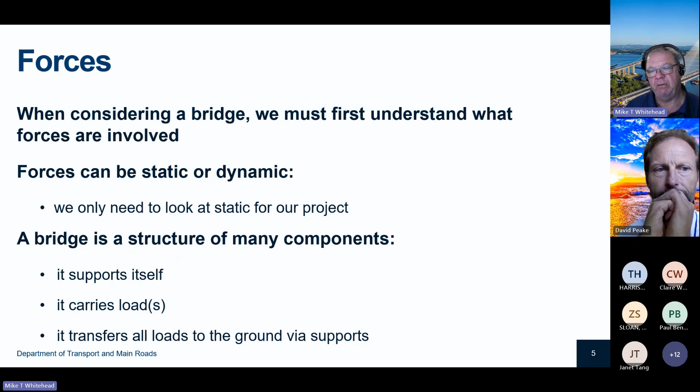So there's a number of forces, and this is where we get into the good old physics. Obviously a piece of spaghetti can be under compression. Whether it's a piece of steel, concrete, or spaghetti, if you have forces at either end pushing it in to try and squash it, it is in compression. If you grab it and try to pull it apart, that's tension. You then can have bending.

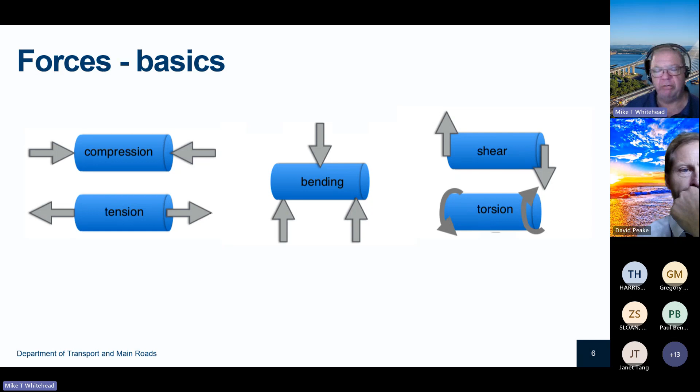Usually if you put a ruler on two rubbers on either side and try to bend it in the middle, that's a bending motion. There's shear forces where one part wants to go one direction and another part goes in another direction, that's where it will snap. And then you can obviously twist it, and that's what causes torsional forces.

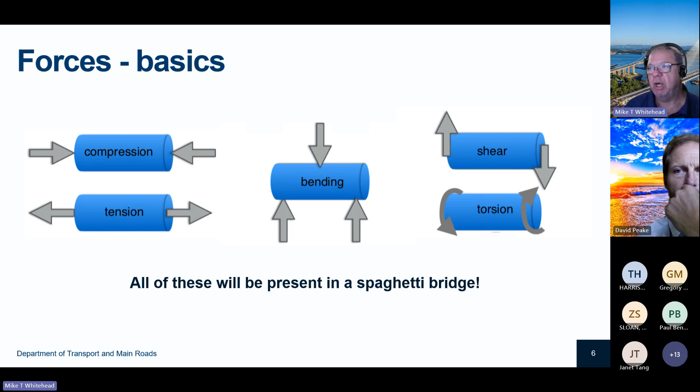Interesting enough, all of those will be present in a spaghetti bridge, and the students have to understand that and design and fabricate or build their bridge to handle these forces. I'm hoping to give you some guidance on that.

So obviously when a member is under compression, if you try to get a piece of spaghetti and squeeze it from both ends, it'll try to buckle. It's going to bend in, out, whatever it is.

So that's the failure method. So obviously if you squeeze it too much, it will just bend too much and then break itself. So when you've got pieces that are under compression forces, you try to thicken them up. The thicker they are, the less likely they are to buckle. Under tension, obviously when you try and stretch it, it's ultimately going to snap. It's just going to start getting thinner and thinner when it starts to fail.

Spaghetti, unfortunately, doesn't really thin down. It just breaks. So it's a bit hard to work out if it's starting to fail there. Not much you can do about it other than, yes, thicken the member up, but generally you find members under compression are thicker than members under tension. They usually can tolerate more force and therefore can be thinner. When bending occurs, you actually have multiple forces occurring in the structure, and there's different ways to handle that bending, and that's why we have different shapes in our bridges to handle that.

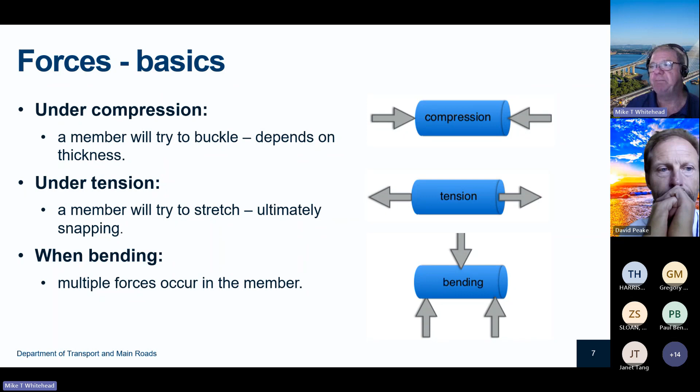If we have a look at it a little bit closely, the top part of this beam is actually trying to shorten. So when it's bending down, it's actually shortening. So it's in compression, whereas alternatively the bottom side of it is actually trying to stretch. So therefore it's in tension. So a beam under a bending load is actually experiencing compression and tension at exactly the same time. So again, the structure has to be able to cater for that.

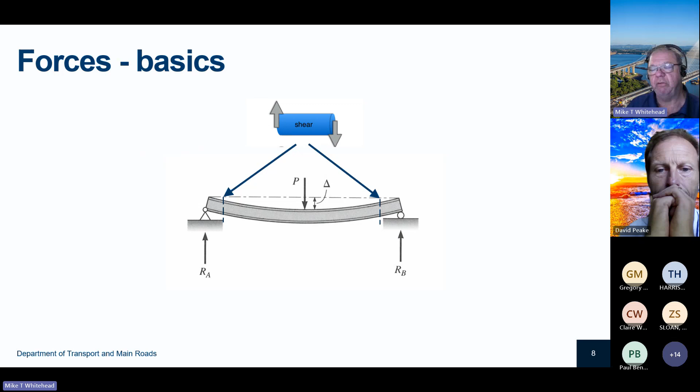You'll also find that there's shear occurring. It's usually towards the ends. So again, it's a spot placed between the forces. So you've got P down and the two R's up. So shear is going to go somewhere in there. And it's usually closer to the supports. And then again, to cater for that, maybe a little bit of thickening around that area to cater for it.

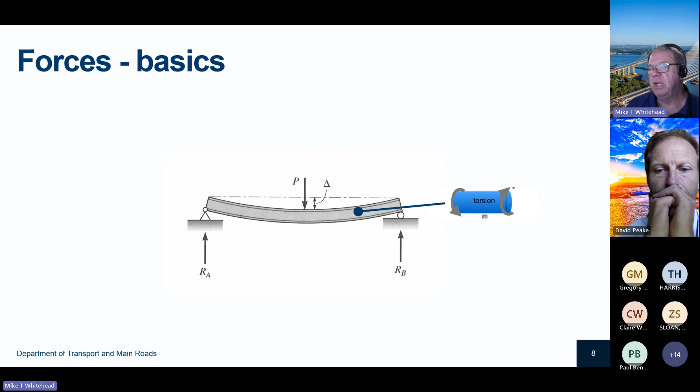And the other one that's there is obviously torsion. So under load, for various reasons, unless it's perfectly symmetrical, any little offset, even by a mil or two, the beam or the member will start to want to twist under extreme load, and that's where the torsional twisting starts. And again, there's ways to compensate for it that we use in our day-to-day structures.

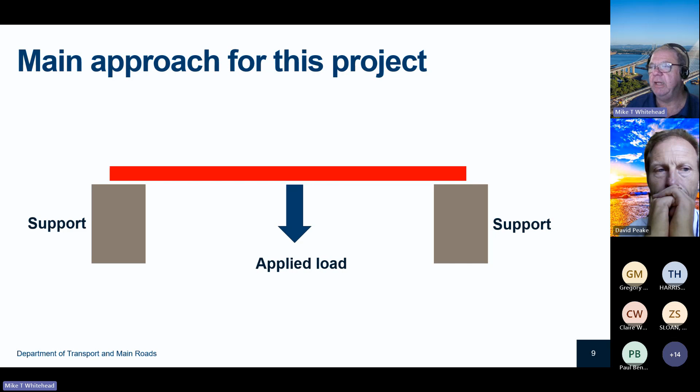So again, simply now we have two supports, which is the frame that the students will load their bridge on. The red represents the spaghetti bridge, whatever shape. Then there's applied load underneath it, which is on a hook, and it'll be pulling down. So roughly speaking, the load will split halfway, and it's probably really important that students understand this. To even up the structure, when they're setting it up on the rig and when they're actually building their structure, try and get the hook right in the middle so that you get as close as possible to 50% of load going to one side and 50% load going to the other.

If it's off, you're starting to increase the percentage of load going to one side over the other. So that side will be the side that's going to experience the most loading and likely to be the failure point. So you want the whole structure to basically try and share the load as close as you can to half-half. And then how these loads are transferred does depend on the type of bridge, which is what we'll explore now.

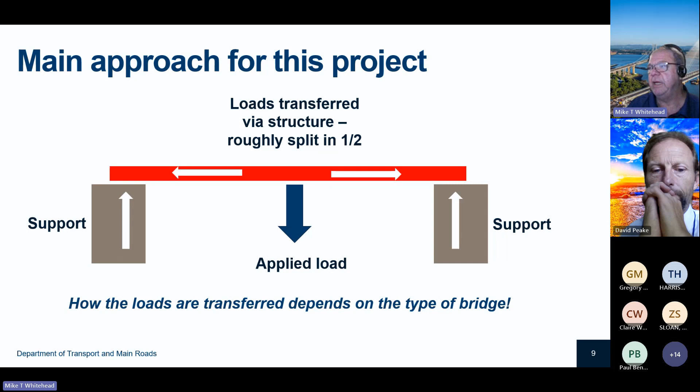So there's a whole range of structures around the world, and this doesn't cover all of them, but these are probably the main ones you'll see. So a beam bridge is quite a common one. It's just simply a whole series of beams with a deck on top supported by the piers underneath. Then you have a truss bridge, which can get a longer span because the loads are transferred from the deck up through the truss and then transferred across to the other side.

Cantilever bridges are a little bit unique in the sense that they self-support from one side and self-support from the other side. So essentially, you can see a little gap in there. It means that the bridge doesn't actually have to connect.

If you take a cantilever bridge like the Story Bridge and cut it perfectly in half, it won't fall down, because it's supported by the two main supports and the span is held up evenly by either side. So it doesn't rely on sharing load across. You have arch bridges, and I showed you a picture of an arch bridge, and arch bridges were some of the earliest bridges ever known to mankind, built with stone in the shape of an arch over creeks, etc. So they're a very strong structure.

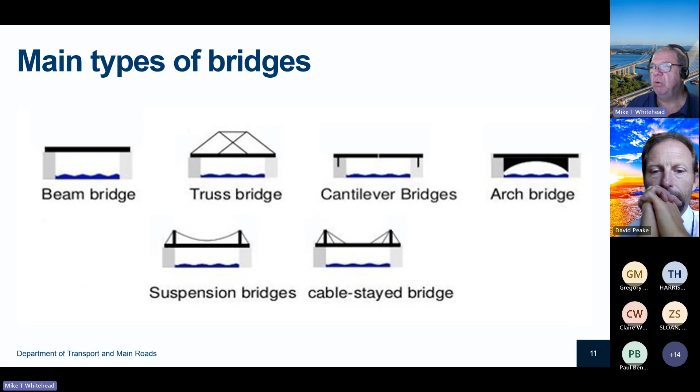Then you have suspension bridges, and that's a whole new ball game, and then cable-stayed bridges. Again, the picture that was behind me on the left-hand side of my head is a large cable-stayed bridge. All right, so the ones that you're most likely to come across in this competition is a beam, of various shapes and sizes. Trusses do appear occasionally. The one that seems to be the winner at the moment is an arch bridge. Unfortunately, this picture is not valid because you can't use the sides of supports, but you can flip it and put the arch above, and that's the type of structure.

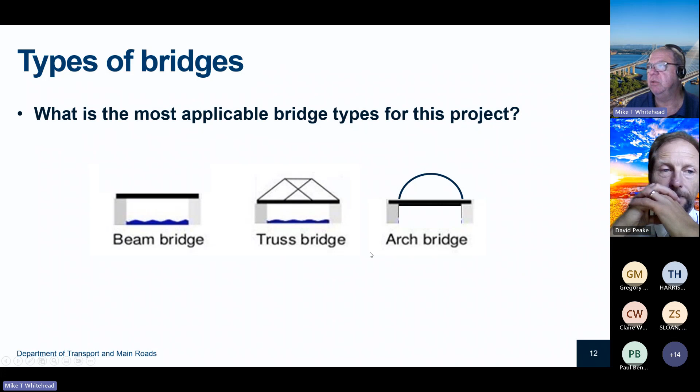Very difficult to make, can be problematic, but it also at this moment in time seems to be one of the stronger structures. I think it's probably because people haven't considered trusses and beams more fully, and these ones would be easier to build than the arch one. But yeah, we'll see, and it's up to the students to maybe try a few of them and see which ones they like or which ones can work better for them.

So now looking at the practical application. So again, these bridges are basically using commercially available spaghetti. Go to the shop, buy it. You're using either PVA white glue, hot glue, or super glue. The dimensions must include a loading hook at the midpoint of the bridge. You must have a deck. I won't spend too much time on this because Greg goes through it a little bit more. The important thing about the deck is you must actually have a deck on it. It only needs to be about 3 centimeters wide. Doesn't have to be very wide. It's essentially so we can drive a matchbox car across it.

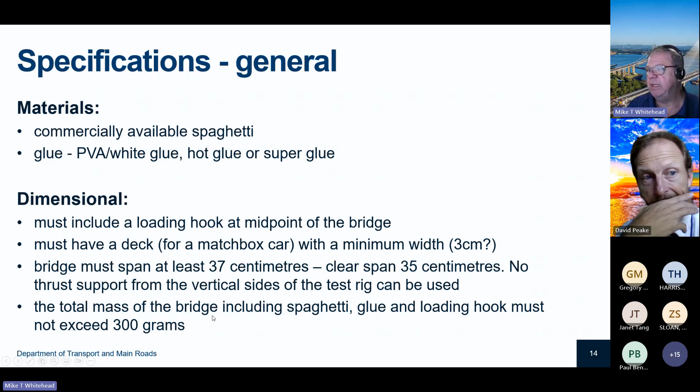So the key factor is to understand how the spaghetti performs. So how's it going to perform under compression, under tension? When it's glued, does it actually change properties when it gets wetted up with glue? And to make arches and some other shapes, we've had students slightly wet or dampen the spaghetti so they can bend it into shape and then let it dry. Does it change properties? Again, it's essentially flour and water, etc. So does it actually change?

And students could actually undertake this through a series of little experiments whenever time permits to just see how it works. So it is important to try and test and prototype your designs, so probably get students started earlier and have a bit of a play. There's probably a ton of them on YouTube. They could get some ideas from there and see how things have worked. And let's also note that the quality of spaghetti does vary from brand to brand and from packet to packet. So it's not a consistent product. So there's no real easy answer which brand's better than another, and you could get a dud packet that breaks really easily. So probably just use what they can get.

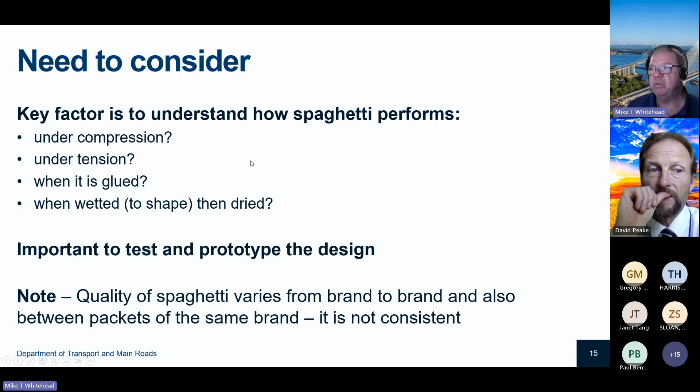All right, how the metal hook is supported is probably a key point because the load is applied there. So it's a real concentrated point force, and it's going to try and pull the bridge down. And so how the metal hook is placed in the bridge and supported is really, really important, because if the spaghetti is lightly supported in there, the load will just break the spaghetti pretty quickly and fall through, and the rest of the bridge will stay still. So it is really important to keep that area well supported, well braced, I suppose, in the structure.

As I said, the deck doesn't need to carry any load, so keep it light. And it is important to brace the structure, and we'll get a little bit more into that. The bracing actually stops the twisting.

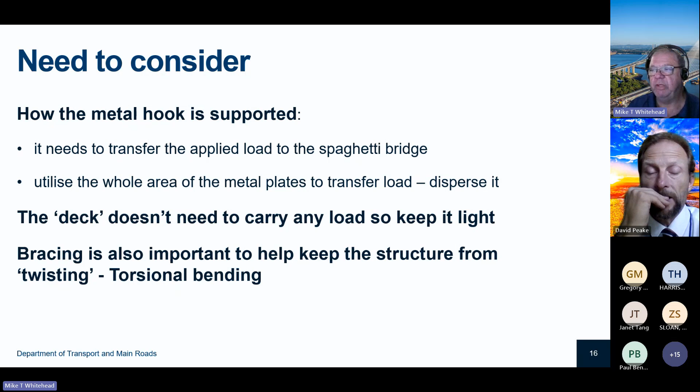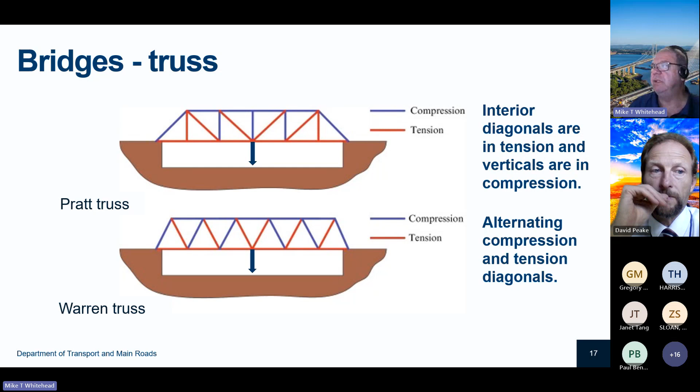So again, having a look at that, we know that buckling is probably the failure mode in compression. So maybe those members are a little bit thicker than the members in tension. So again, it might be good to think about how we can distribute the load to maximize the strength of it, instead of making all members exactly the same, where you could be wasting material.

This is a fully detailed picture of what a truss bridge looks like. This one here, obviously you've got a truss on one side, another truss on the other side. You have a deck, and then you actually have all the different cross braces in there to stop it from twisting and moving. So the students wouldn't have to build something this elaborate, but it would certainly give them some good ideas how they could brace it, and actually make a box shape, which is quite a strong shape to carry the load instead of having one truss.

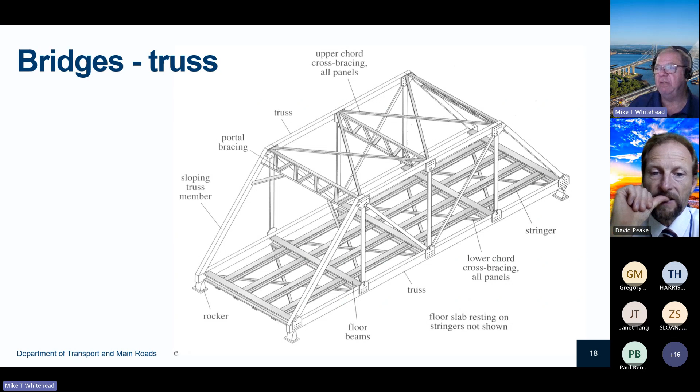There's an example of a great truss bridge, similar to the one I've just shown you, which is the Burdekin Bridge up in North Queensland. It's been there for quite a long time, carries both road and rail, and that is a really good example of a good truss bridge.

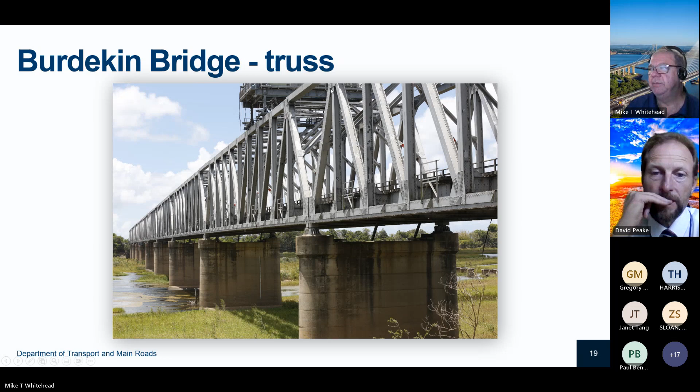So the next one we've got is arch. Arches are, as I said, quite a strong structure. The top arch is actually what carries the majority of the load. So whatever's on the deck, or the stiffening girder as it's mentioned here, that load gets transferred up through the hangers into the arch, then the arch transfers that across to the bearing supports on either side. So the arch itself is usually quite a thick, strong structure.

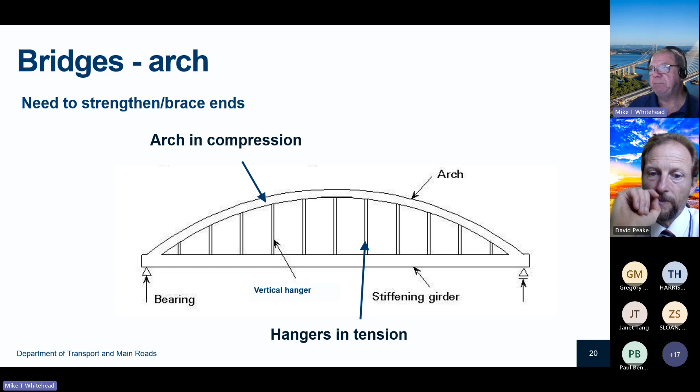With spaghetti, as I said, typically you would have to wet it or make a bit of a jig for it, wet it and then lay it in there and let it dry, or glue it in so that it dries in that arched form. And then you'd have to put in the hangers down to your deck. I'll go to the next slide.

On the right-hand side is an example of some arches that have been done around the world in spaghetti bridges. This one doesn't really have a deck, so it wouldn't pass. And to improve the strength, all the hangers are coming down to where the hook is. So again, the students could do that. We've had examples of that in the past in our local competition, where the hangers all come down to where the hook is to try and transfer the force on the hook up into the arch and then down to the sides. But again, this one doesn't have a deck, so it wouldn't be permitted.

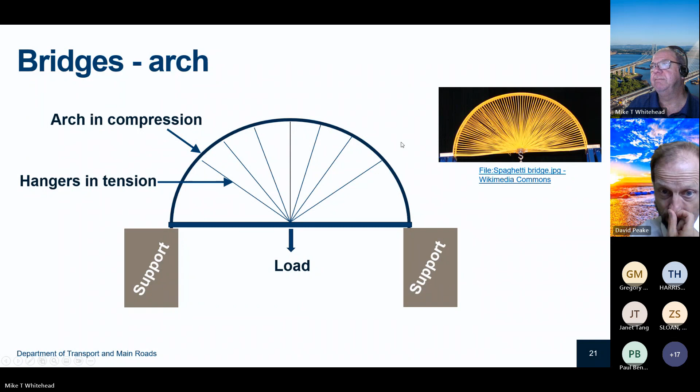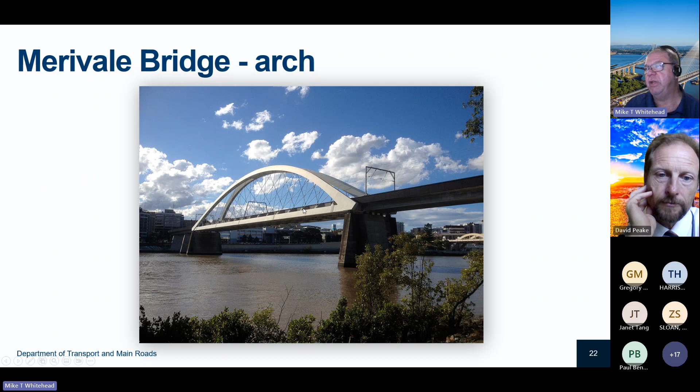And that's the picture I showed you. Those hangers obviously are at multiple locations across the deck area, to transfer those loads up into the arch.

Beam bridges are probably a little bit underrated, but they're very common and can do a very good job. Beams or girders need to be thick or deep enough to resist the bending forces. You can demonstrate a beam bridge quite simply to students. Get a 30-centimetre ruler, put a rubber under either side. Put it flat side down, and if you press on it in the middle, it'll bend very easily because it's not very deep in the direction of the force. But if you turn it up on its side and press in the middle, it won't bend, because the thickness is now several times larger.

And so that's what you're trying to do in a spaghetti bridge: get beams that don't have to be very wide, but have to be quite deep, to resist the bending moments, not move so much, and carry the loads. The problem is they'll twist easily. So that's where having two side by side with some bracing will benefit.

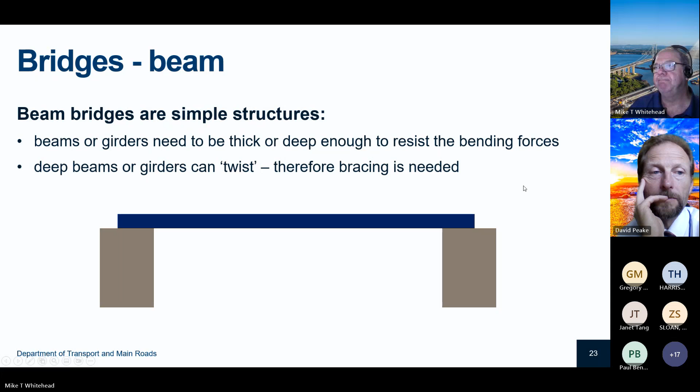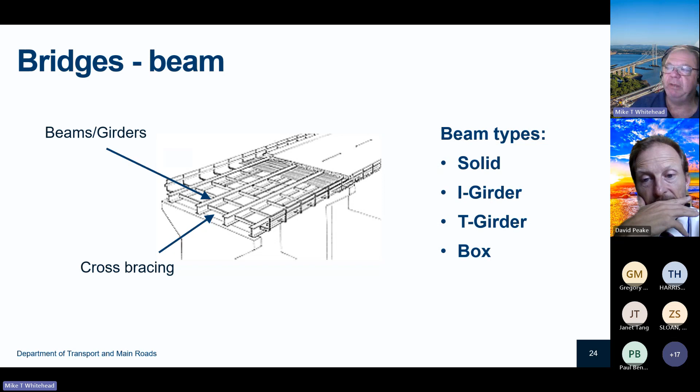There's a number of different beam types. So you have solid beams, I girder beams, T girder beams, and box beams, and there are several others.

My animation didn't work on this, so I don't really know what's happened there. But anyway, looking at a solid beam and making one in spaghetti - you'd make a little jig, but essentially what you do is just layer the spaghetti inside itself until you get the shape you want.

The depth improves the strength against bending, which is your predominant force that you're going to deal with. The width will resist the twisting, but if you put another beam beside it and add some bracing, that can help with the twisting.

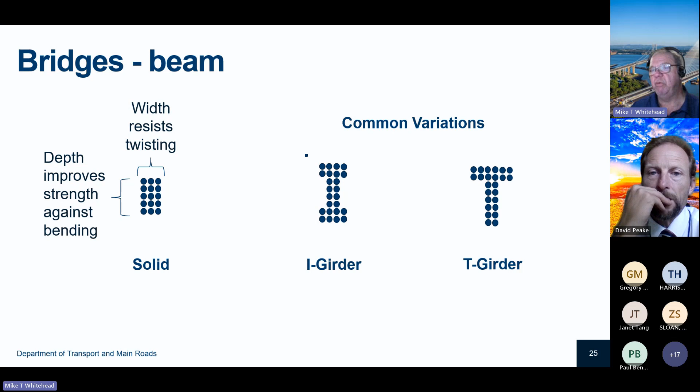The other common variants are I's and T's, as mentioned before. The benefit of having an I, as mentioned with the different forces, is that the top flange, or top part of the I, and in this case the T beside it, is in compression, so it wants to move and buckle - you can thicken it by putting that top little flange on.

The bottom is in tension, so if you need more force there, you can use the bottom part of the I to give extra strength where the stresses are highest. You can then thin down the link between the two, because that's just holding the bending moment, so you can make it thinner.

So that's where I's and T shapes come into existence, to address those different forces within the member itself. So you've got those.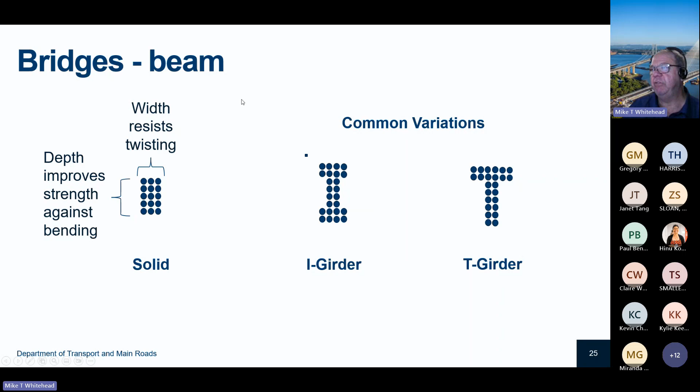These are the typical bridges you'll see around Queensland and other states, where the beams are made and put onto the headstocks and the piers, and then the deck is part of it. They're very quick to build and they do a great job.

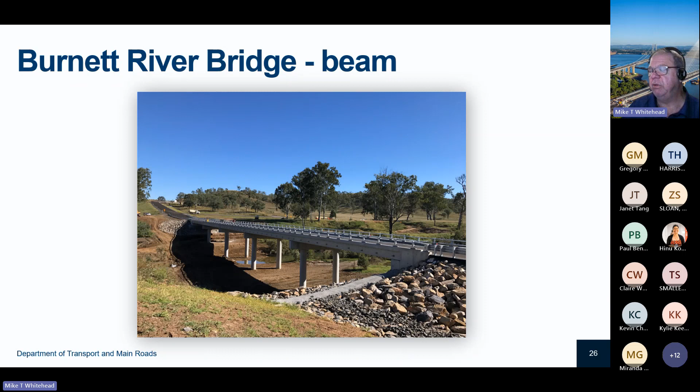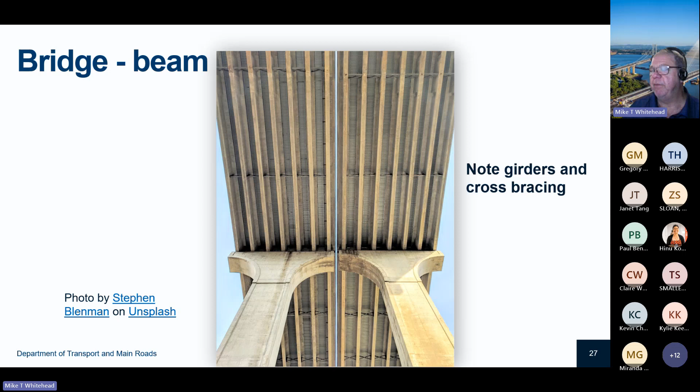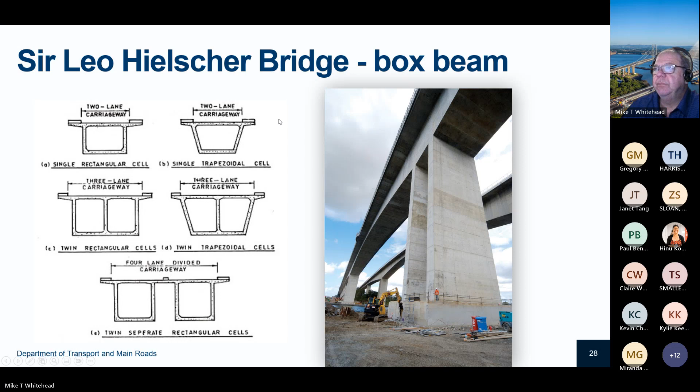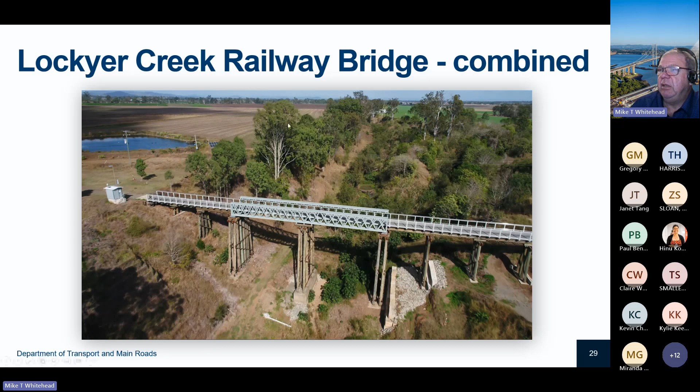Just to finish off, this is a combination bridge, not something for spaghetti - an old timber bridge which has had some bracing put on it to help keep its strength up. Then you've got different spans in there, including a steel truss across, an open truss. And that's it from me - I'll hand back to Greg.

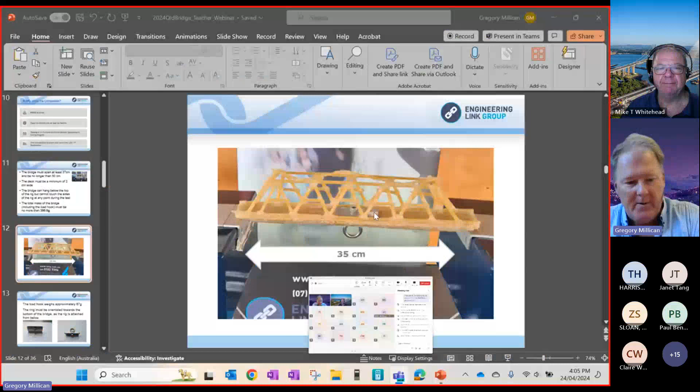Greg, are you supposed to be sharing your screen? Oh, am I not sharing? That doesn't help. Thank you, Mike, for pulling that up to me - I just realised it. Let me try that again. I appreciate you letting me know. Let's try that again. Is that working now? Yep, beautiful, thank you mate.

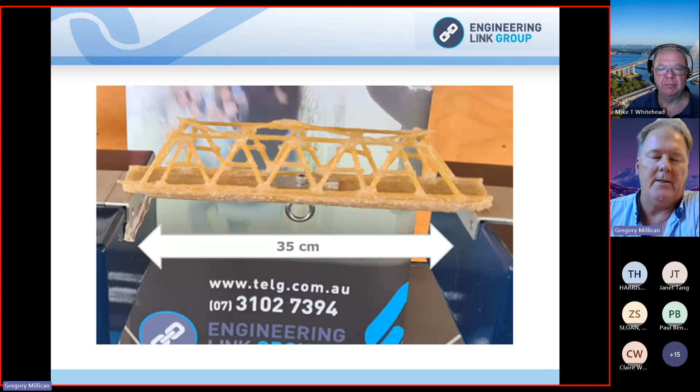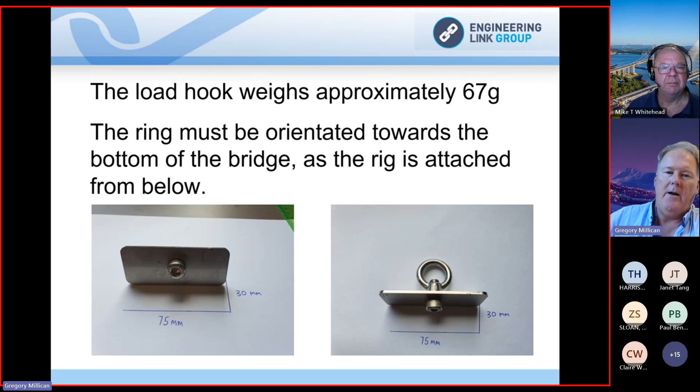As you can see, they're around about 67 grams. They're custom made for us, so they do change - the mass changes slightly, but not significantly - and that's the approximate size of the plate, so 30 mil by 75 mil. So the 30 mil, you can see that if they choose to put it lengthways along their bridge, that's where the 3 centimetres comes from. So it has to be at least as wide as the load hook plate.

Any brand of spaghetti is fine. We're not precious about it. You can use home brand all the way through to the most expensive spaghetti, depending on what they want to use. As long as it's called spaghetti, or as you can see from the Zaffarelli brand, they number their spaghetti sizes, so size 4 or 5 is fine. Angel hair is way too thin, and they won't want to use that anyway because it'd be weak.

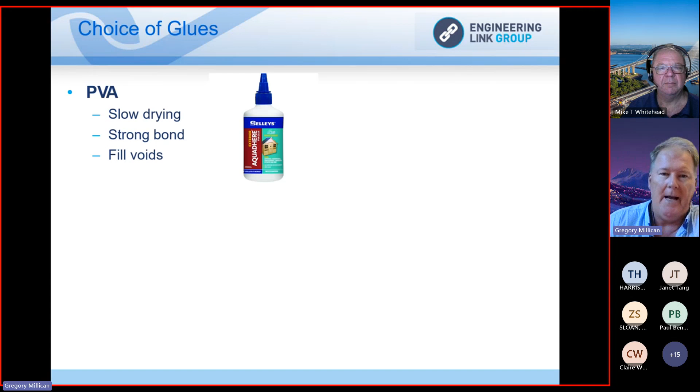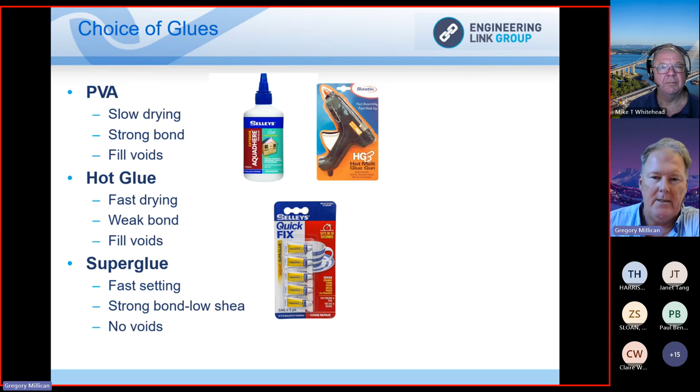The types of glue that are allowed: you can use PVA glue if you choose. We had a student a few years ago run experiments across different types of glue, and this is what he found. PVA is quite slow to dry, but it is strong, and it fills up gaps, which is good, though the slow drying is a negative. Hot glue dries really quickly, but it's not very strong in terms of bond strength, and it also fills in voids in the spaghetti, being a natural product. Super glue is probably the best of both worlds, although, as anyone who's worked with it knows, it's a pain to use.

A couple of things you're not allowed to use: you can't use epoxy or two-pack, and you can't use liquid nails either, in tube or gun form. None of those are allowed this year. That's a bit of a change from last year.

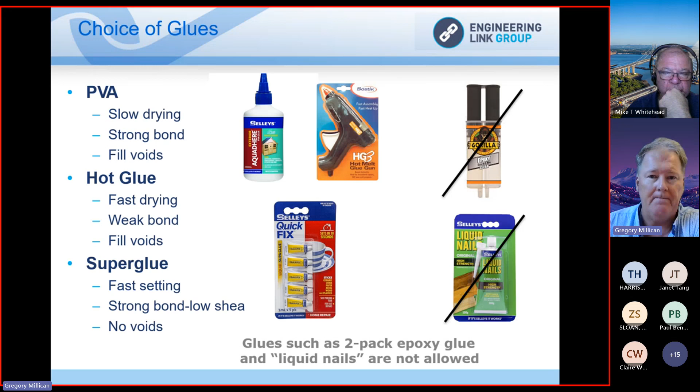So where to start? Well, Mike's gone through a number of different designs and given some ideas, and I'd still love to see a box beam design as well. I think that would be really interesting. As a group, it'll depend on how much time your students have and how much time you're willing to donate to them. I'll show you some past bridges in a moment and where you can go to have a look at those.

Try some different glues and see which works best for you. I know of a couple of schools in our area that have already built some bridges and done some testing, and are going to narrow down their ideas to the best ones.

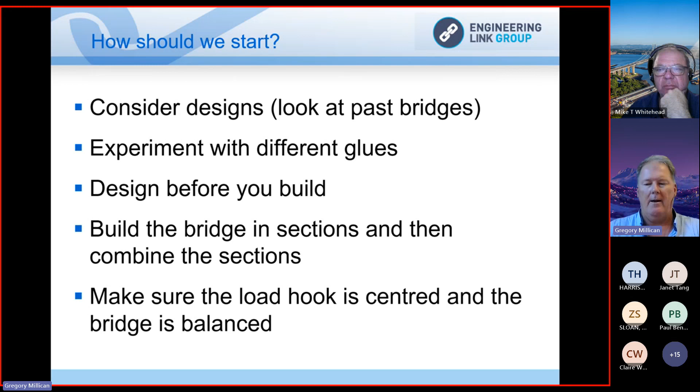Otherwise, one side will take more load than the other and it will fail more quickly. I've included some links here, which you'll get a copy of in this presentation in a couple of days' time, so feel free to use those. Some of you will know other links for designs and testing, so feel free to use anything you want. These are just ones we've seen in the past.

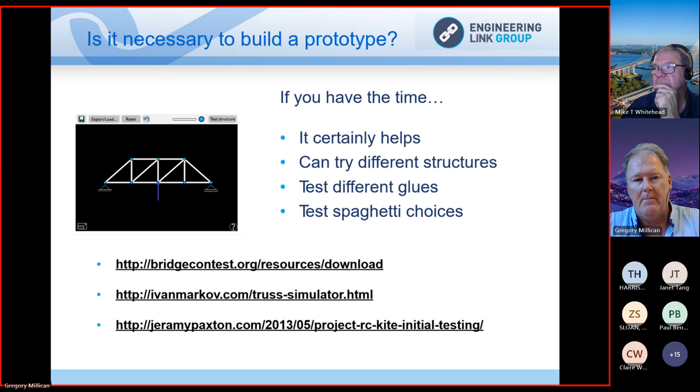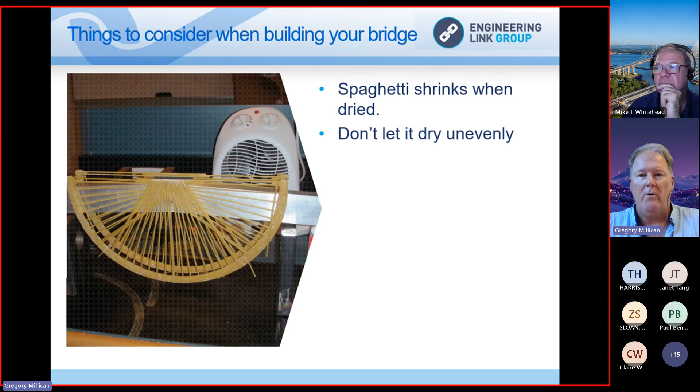You can build prototypes if you have the time. Some things to consider when building your bridge: spaghetti shrinks when it's dried, so keep that in mind. If you wet it and then dry it, it actually ends up smaller than it was. Try to get it to dry evenly, hence the use of the fan and heater in the background, to keep it all drying evenly.

Use spaghetti from the same packet when possible. Most spaghetti packets are 500 grams, so for a 300 gram bridge you should have enough in one packet. Keep the spaghetti with the bridge when storing it, so they're in the same atmospheric conditions. It sounds simple, but it's actually really important.

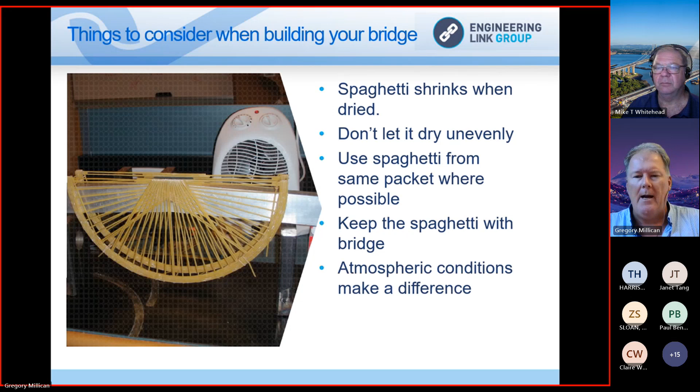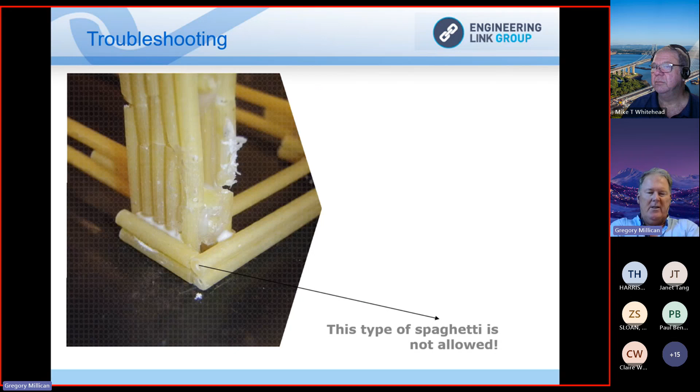And as mentioned, where you're building it makes a difference. This is just an example of putting lengths together to make it thicker, but unfortunately this photo is from quite a number of years ago, and that type of bridge — that type of spaghetti, sorry — isn't actually allowed because it's hollow.

A few other things to consider: make sure the bridge is longer than 35 centimetres, and that the feet are as level and as rigid as they can possibly be. Even if a bridge is slightly twisted, as soon as you see a twisted bridge you know it's going to fail quickly, because the forces won't be evenly distributed.

As mentioned already, please don't use too much glue. We've had some students just paint it in glue. They can be disqualified if we consider the glue to be excessive, but we'll do our best to keep every bridge in the competition. That's the intent - for the kids to actually be involved, but sometimes we have to draw a line somewhere.

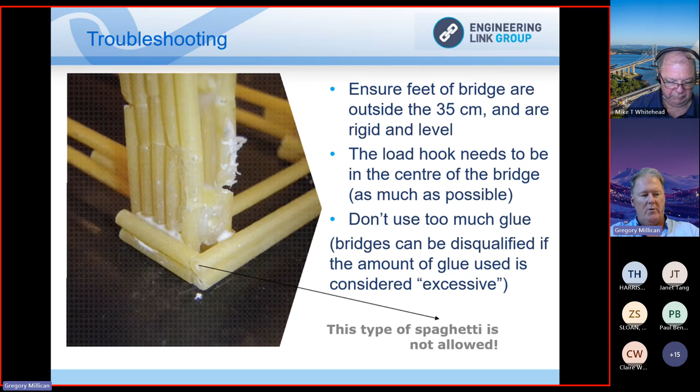So how does it all work? The winch pulls down on the bridge. That's important for the students to understand. In the photo, the winch is that little part, and the load cell is in that yellow circle. It weighs around about 0.6 of a kilo, so just keep that in mind.

So what I tend to do is if I hook it up and it fails immediately, then we'll give them a small mass lower than 0.6 kilos, and then we test it from that point on. The way we measure it: the load cell will be attached to the bottom of the hook, and we'll pull down on the bridge using the winch, continuing until it fails. The load cell has a meter that measures the peak load, so it'll continue to increase until no more load is accepted and the bridge starts to fail. Then we'll record that value.

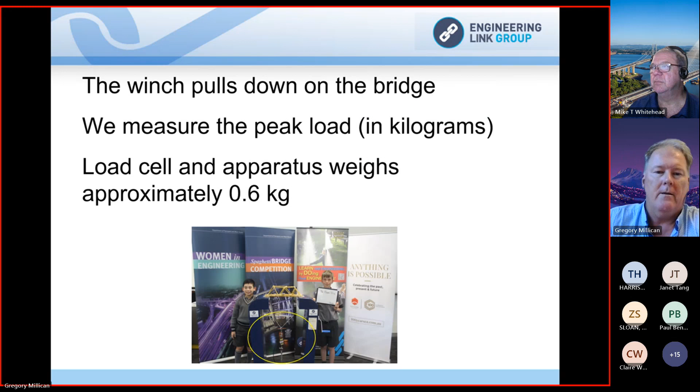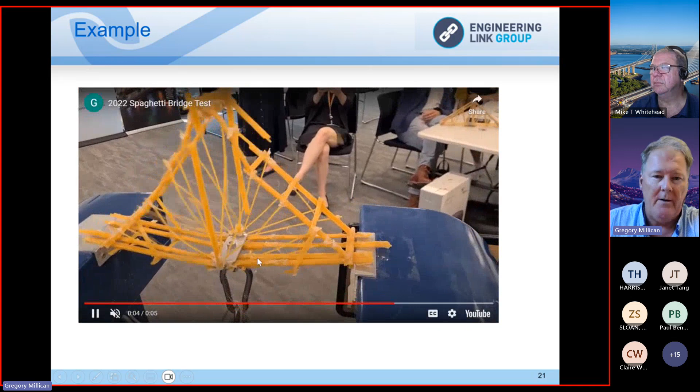So here's some examples. I hope the sound isn't terrible - apologies if it comes through very loudly. Oh, I've turned it off. So this is an example of a test from a number of years ago. Notice, so that's how it is tested.

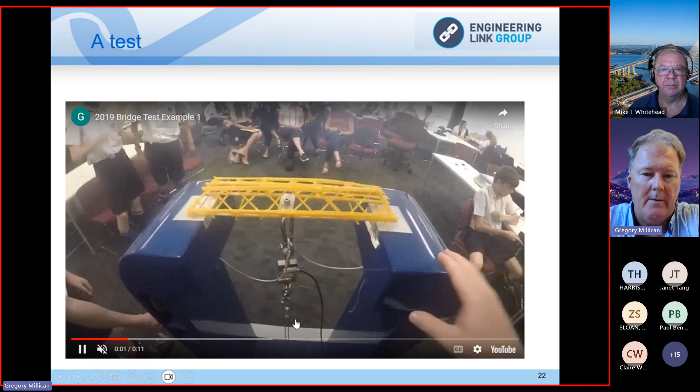Here's another example of a test. This one wouldn't be accepted this year because the deck is really quite low. But again, you'll see, so we record every test. This is an example of students having the bridge tested themselves. We record it, and there's an example of the hook pulling through the deck without actually impacting the bridge itself.

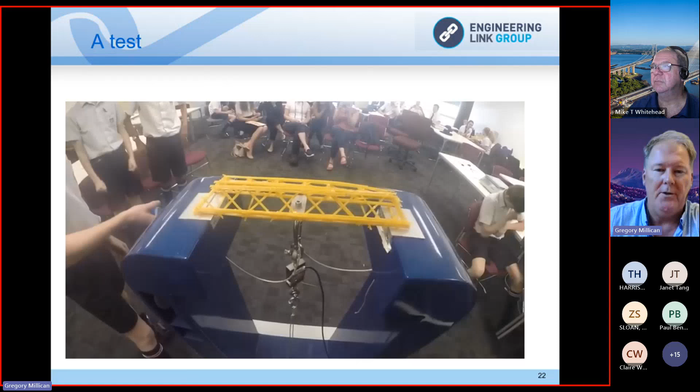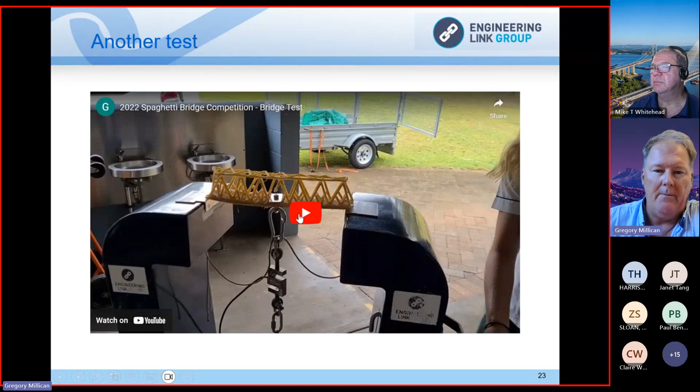Which is quite disappointing for the kids, but it's a good one to show them what not to do. As I said, we record each test, and then you will get a copy of each recording - each bridge will get a photo and a recording. This is another one we did up on the Sunshine Coast a couple of years ago.

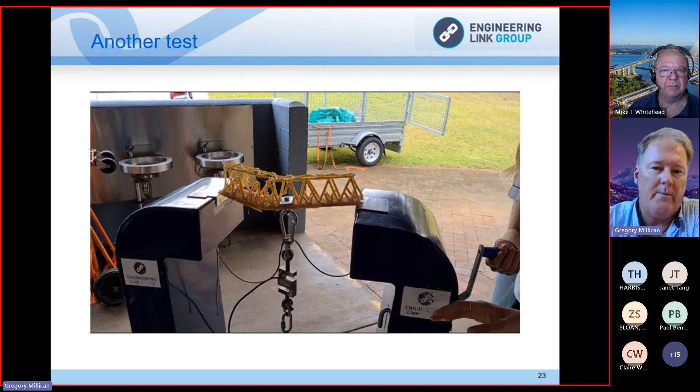So again, this one - they just tested it. This one goes a bit slow, apologies, it takes a while. But you can just see, you can start to see how it's starting to collapse. So it would have already recorded the peak load, but we'll keep testing it anyway until such time as she fails.

Now this bridge was in 2022. This bridge was the winner, but it would not be accepted these days because, as you notice, it doesn't actually have a solid deck - it's just an open space. But again, I thought I'd show you just for the sake of it. This one takes a while for it to actually break, and you'll see the values that this bridge was able to hold in a moment.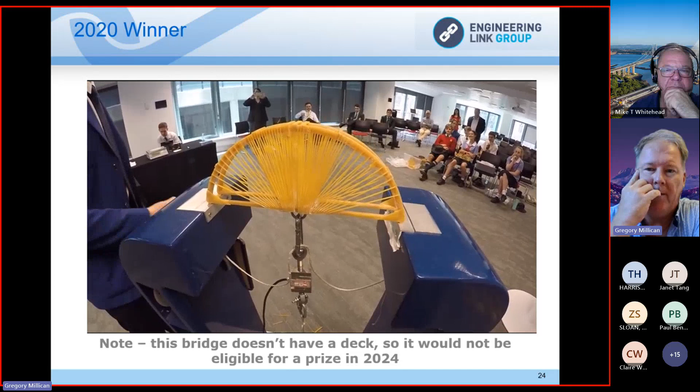You can also see Mike in the background. There we go, so she takes off - you can imagine the forces if it's going to explode that much. Let's have a look at the next one. So this is 2021, similar situation. We changed the rules at the end of 2021.

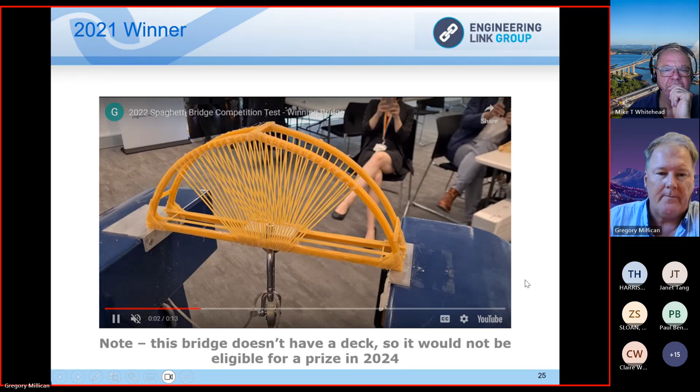So it's winding - again, it takes a while. You don't see anything on the scales, obviously, but I just want to show you. So that one failed in a different way.

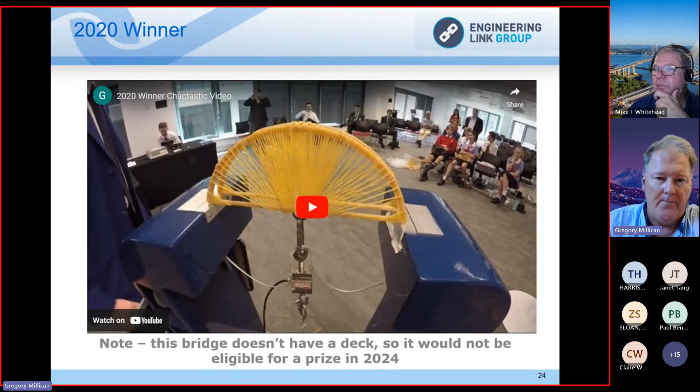And again, the beauty of us recording these is twofold. One, it's good for this sort of thing and you can learn from it. But two, the students who built it can take it away and try to analyse and see why it failed and where it failed to improve. The reason I say that is because the student in this video, and this video, and this video, is all the same student. So it's the same person, and they won it three years in a row because they continued to develop their design.

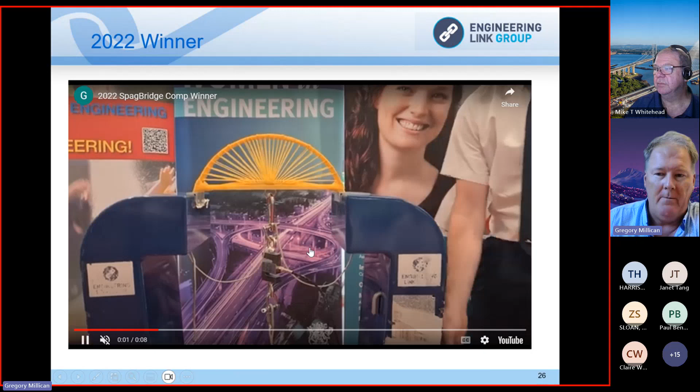Now, you can't see the deck on this one, but this is the year that we changed it, and it actually has a deck. But it's the same person, or the same group. So again, she explodes in a fairly spectacular way. Now, this is last year's winner - you'll see the Dodgy Brothers portable rig that I put together.

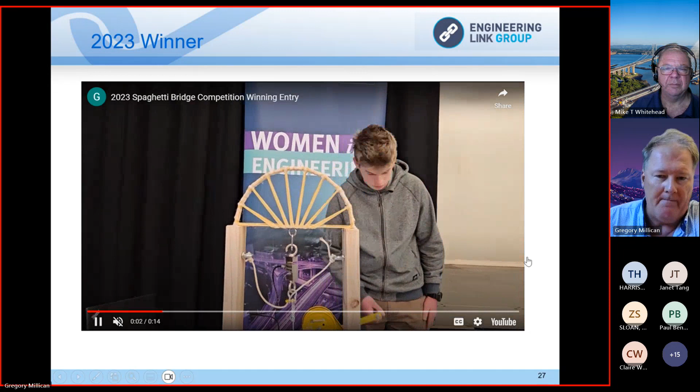It's a little bit better than that now. So this is the student who won last year, and this is his bridge. He gets up to some serious masses, to the point where it actually almost breaks my test rig. See, and there she goes.

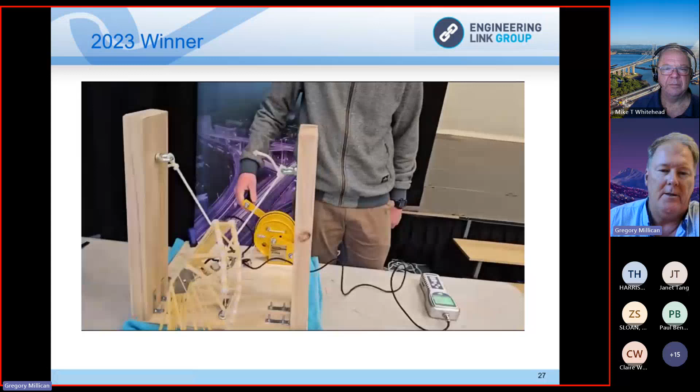All right, so here's some results just to give you some idea of the sort of levels that students get to. Not just the high point, but also you notice that even down to 10th place, we're starting to get into realms for those students who are new and those schools who are new. A lot of these, this was the first year of some of these schools ever participating, and they've done quite well. So don't think that it's just because you're new, your kids are out of this.

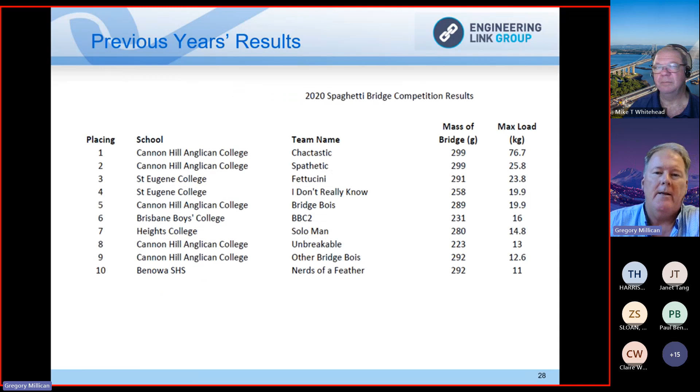2020's results, 2021 results, this is the top 10s, and 2022. So you notice the name at the top, Chactastic. That student didn't win last year because he graduated year 12. But then last year we have 64. We had a number of good results last year, which is exciting.

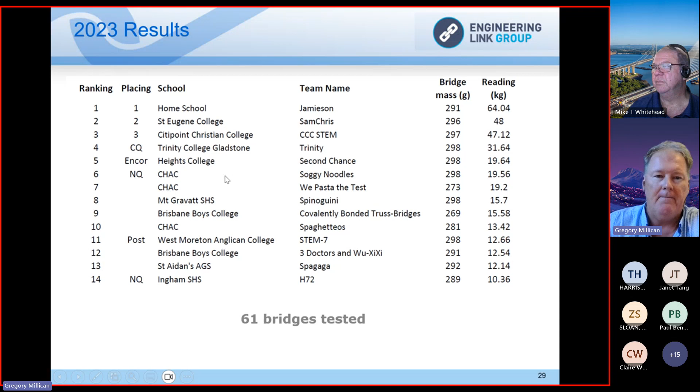Again, very grateful to the Queensland Government through the Department of Transport and Main Roads for our prize money. So the first place team gets $700 as the winning prize. Second place is $400 and third place is $300.

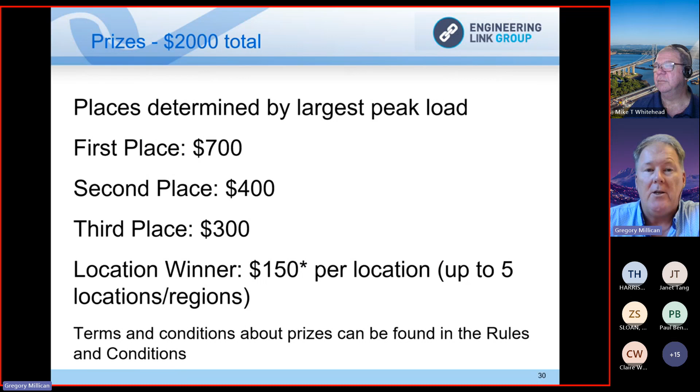And then we do location winners. So if you're not one of the first three, but you happen to be the highest achieving bridge in your location, then you will receive $150 for the team. There are some conditions and rules about that, which can be read in our rules and conditions download from our website. So that's pretty exciting. I know the kids really enjoy getting that cash.

As I mentioned, the registrations are currently open. We've secured the two places so far, and we're just working with a school down in Logan and also in Townsville, and we'll get those dates to you as soon as possible, but they will be after August the 13th, so it'll be the week after that or the week after that again. August the 12th, for those here in Brisbane, is the public holiday for the Moreton Bay Logan region, and then the 13th is the day after that, here at my school.

Now, if you're not able to make it to one of the testing locations, please don't make that a reason not to participate. We would really encourage you to do so. We've had many bridges posted to us and been successful. So pack them up carefully. We can provide some advice around that, and then we will test them for you. We will record those results and you will still see those.

If you are around or would like to watch the testing done in Brisbane on August the 13th, you're welcome to tune into our webinar link. We live streamed that test day, and you're welcome to grab the link from us if you're interested.

So what we started last year, which we're very excited about, is that Engineers Australia have got some engineers who are more than happy to mentor schools. We trialled it last year with a couple of engineers and St Aidan's Anglican Girls School here in Brisbane. The engineers went out and visited the girls a couple of times in their build up to testing. It was the first time they participated. Feedback was brilliant from both the engineers and the students and the teacher.